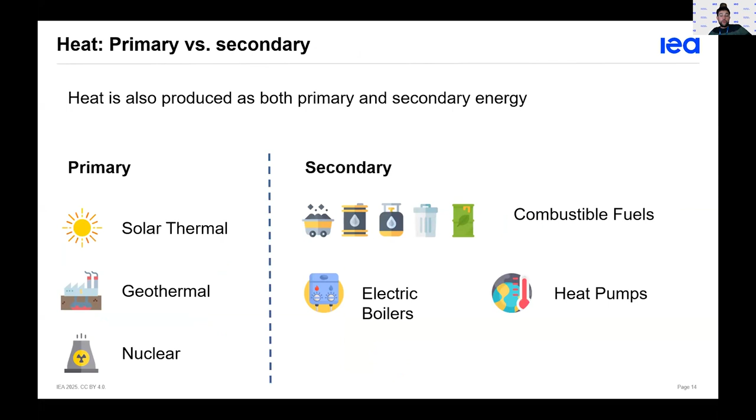By burning combustible fuels, from transforming electricity into heat in electric boilers, or using heat pumps to capture heat from low temperature sources.

Let's have a look now at the producers. As you may know, electricity and heat producers can be divided into two categories: the main activity producers and the auto producers. So main activity producers generate electricity and heat for third parties as their primary activity. It means that the main purpose of the facility is to generate electricity or heat. For instance, if we think about a nuclear power plant, we have the little logo there. This is a perfect example of a main activity producer.

By contrast, an auto producer generates electricity or heat only as a secondary activity in support of their primary activity. So again, another example, a large chemical facility may have an on-site power plant to generate electricity or heat for use in the production processes, and some of this electricity or heat may also be sold. However, the main purpose of the facility is to produce chemicals, not to produce electricity or heat. So that's why these would be classed as an auto producer.

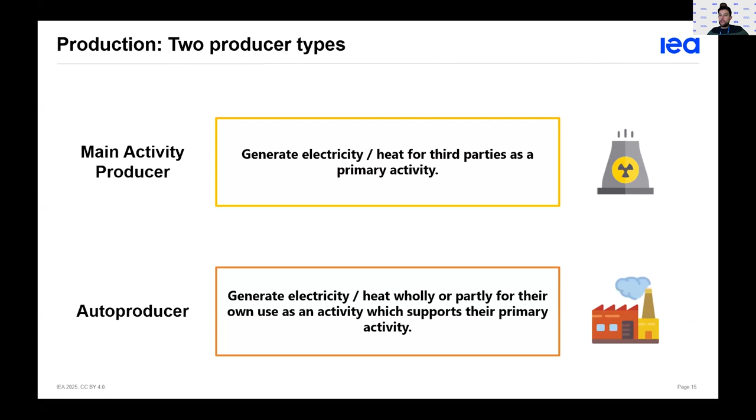And it's very important because it's something that we discussed many times with our contacts, with the countries. It's important to note that this distinction is not based on whether the plants are public or private, but on their primary activity. So main activity producers and auto producers can be public or private companies. So the ownership is irrelevant.

We have also three different types of plants. Electricity-only plants, which, as the name suggests, only produce electricity. We have heat-only plants, which again generate only heat. And also we have the combined heat and power plants, or CHP plants, which can generate both electricity and heat in a combined process.

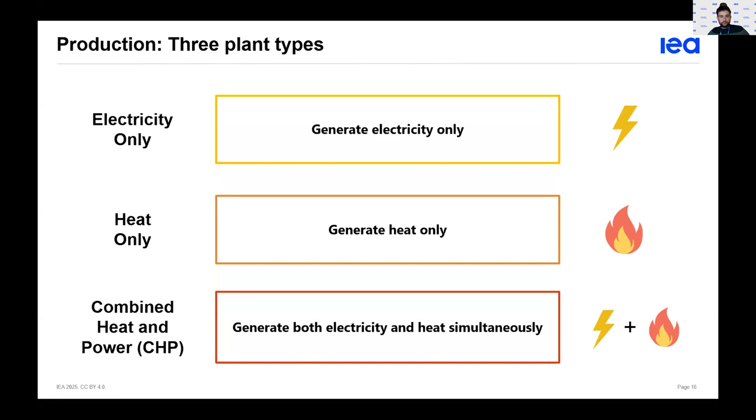This distinction is important. These two distinctions that we made, so main, auto, and the three kinds of plants, are important because we have some reporting conventions used in the reporting of electricity and heat statistics. And this is very important and fundamental to report correctly electricity and heat statistics. For the main activity producers, the convention is very simple. So all production of electricity and heat is reported from all plants.

For the auto producer, the situation is different. So for electricity, all electricity produced is reported in the questionnaire or in the statistics. However, only the amounts of heat sold are reported. The amount of heat generated for own use on site, those are not reported. Similarly, when reporting the associated fuel inputs to electricity and heat production, for heat, only the amounts of fuel input associated with heat sold are reported. So this is very important.

I added a note because, for those reporting with the annual questionnaires, in the new questionnaires there is also the option to collect now the heat auto-consumed by auto producers. This is just a note that I wanted to add.

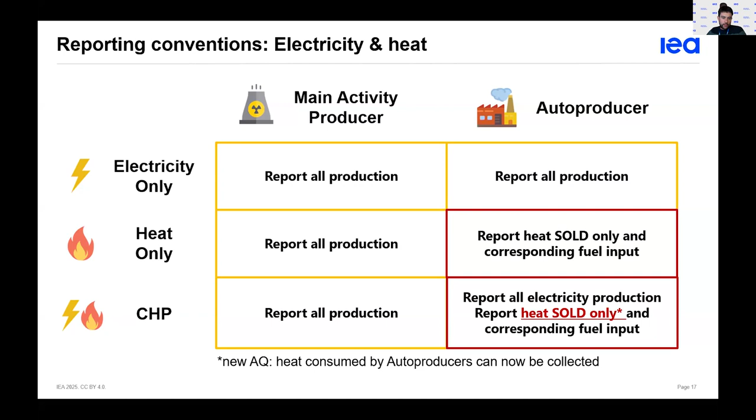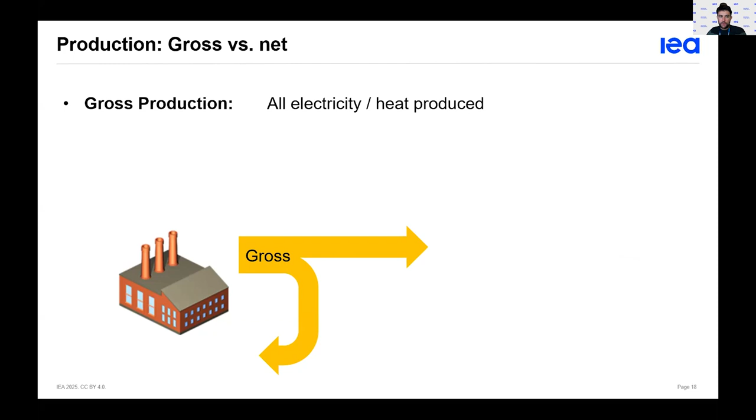Another important concept, which sometimes can be confusing as well, is the distinction between gross and net production. Gross production refers to the total output of electricity or heat generated in a facility before any amount of energy is used. Of course, not all of this energy is used beyond the power plant. Some of the electricity and heat generated is used on site at the power plant for lighting, heating, supporting the plant operation. And this is called own use.

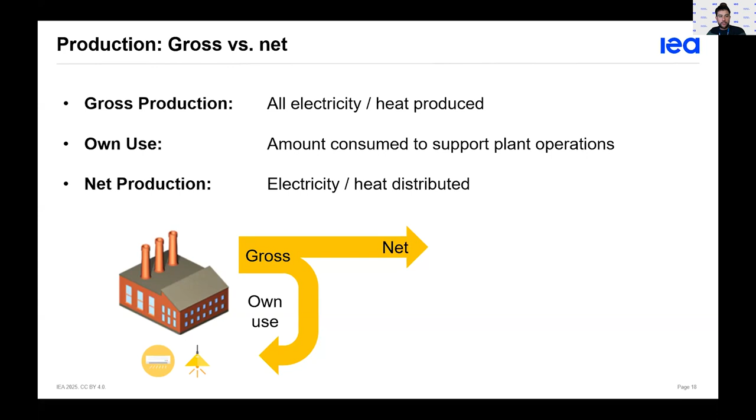So what we call net production is the difference between the gross production and the own use. And we also have a reporting convention for own use, and this is due to the reporting convention that we discussed before about heat in auto producers. So again, for main activity producers, the convention is very simple. The net production is equal to gross production minus the own use.

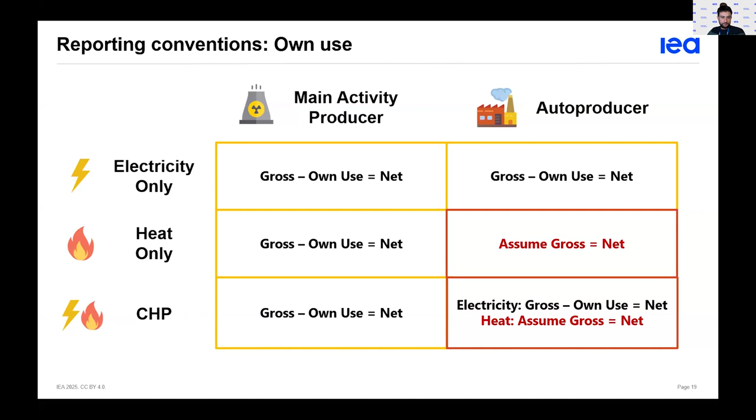Now we have covered, I would say, the tricky part of the presentation, because the reporting conventions are always very tricky and very difficult sometimes to understand. Let's have a look now at the electricity and heat supply chain and at some of the data that we collect in our questionnaires.

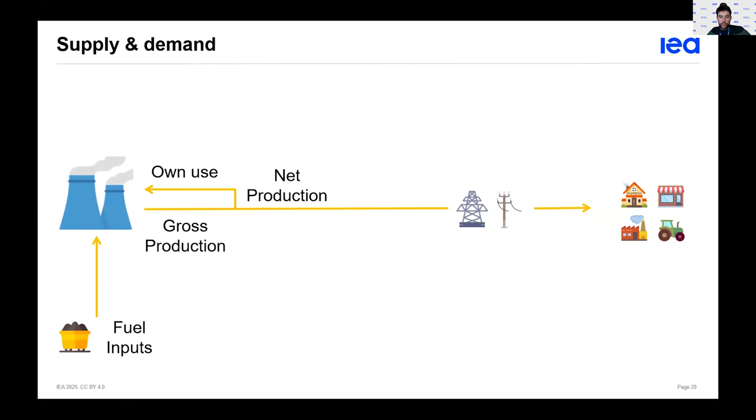In terms of supply, what we collect are the fuel inputs to electricity and heat generation, the gross production, and the own use. The net production is the difference between gross and own use. We also collect information on the electricity used for pumped storage hydro, for boilers, and for heat pumps. Finally, on the supply side, we also collect trade data, the exchange, imports and exports of any country with respect to others.

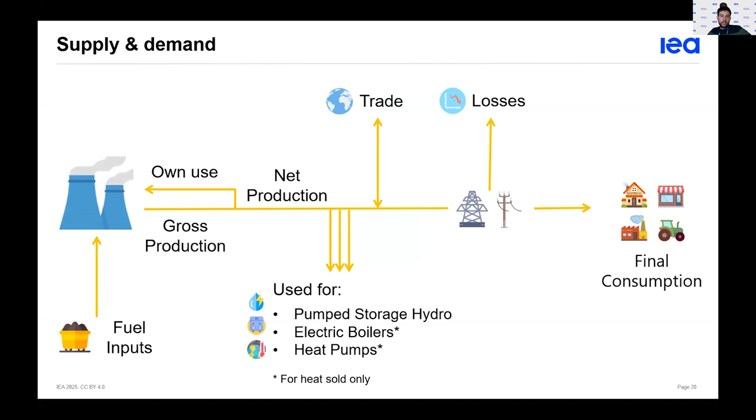On the consumption side, very important, we have the losses, which we mentioned a little before. During transmission and distribution we have some losses that I will explain later in more detail. For final consumption, we also collect data depending on the different sectors. Finally, we also collect data such as peak load and capacity data, which can be useful for electricity analysts.

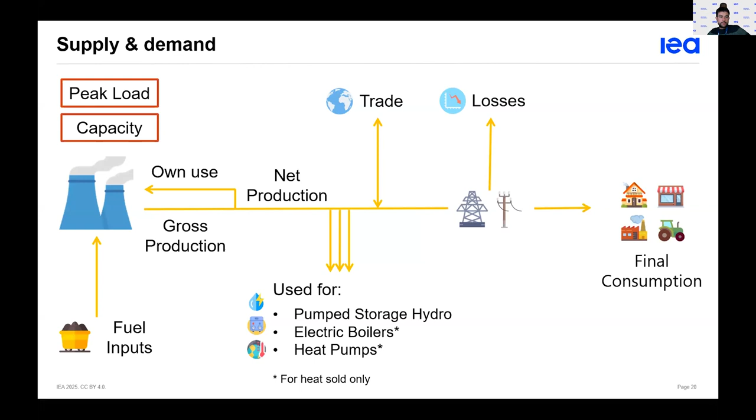As I mentioned, transmission and distribution losses occur between supply and consumption, and they are one of the reasons why there is a difference between the values of supply and the values of consumption. As electricity travels through cables and transformers, energy is lost along the way. Much of this is in the form of heat, because when electricity flows through a cable it raises the temperature. This energy is lost and dissipates into the surroundings, reducing the amount of electricity that reaches the final destination.

In general, losses can be expected to be in the range of 5 to 15%. Losses are lower in more advanced and well-maintained grids, and higher in older or more distributed grids, or where there is a high rate of meter bypassing, that is, electricity theft.

This is what we were discussing before. If we consider the global gross electricity production, we have a value of around 30,000 terawatt hours, but just 84% is able to cover the final consumption, the demand, because around 16% is lost in own use and losses.

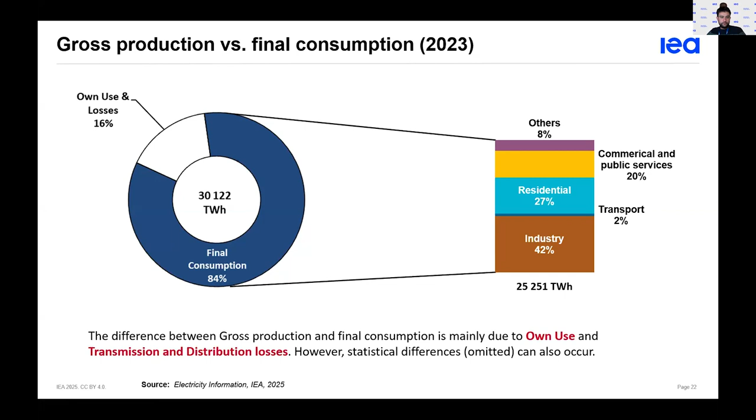Now I would like to speak about some concepts that can be really useful as checks when reporting electricity and heat data. The first is the generation efficiency. Efficiency is calculated as the total gross energy produced by a plant divided by the energy content of the fuel used to produce it, basically the energy output over the energy input. Since energy cannot be created from nowhere, efficiency needs to be lower than 100%.

The efficiency differs by fuel and technology. If you think about a coal power plant versus a combined cycle power plant using natural gas, generally the combined cycle has a much higher efficiency. It must be calculated in energy units, meaning we need to use the same energy units for both the inputs and the outputs.

This is a simplified example of a power plant using 100 units of energy as input and producing 20 units of electricity and 45 units of heat as output. The general efficiency of the plant would then be 20 plus 45 over 100, so 65%.

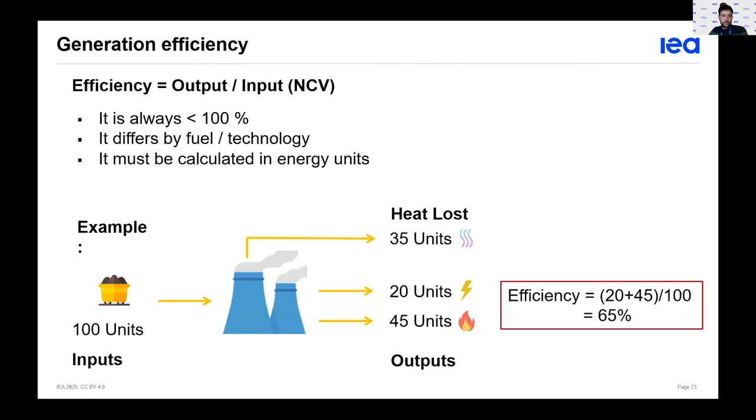It's interesting to discuss trade, because we have a unique reporting convention for trade in electricity. Unlike other fuels, trade of electricity and heat is reported on the basis of the borders crossed, not on origin and destination. This means that we include the amounts in transit.

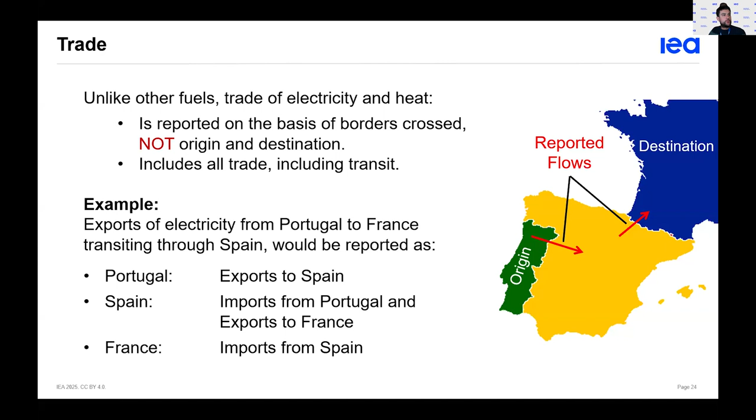For example, if Portugal exports electricity to France, it needs to pass by Spain. Portugal would report these exports to Spain. Spain would report both the imports from Portugal and the export to France, and France would report the imports from Spain.

Another concept which I find useful to discuss is the difference between energy and power. Simply put, power is the rate at which energy is used or produced - it's the energy divided by time. But what I want to stress is the difference between watts, which are units of power, and watt-hours, which are a unit of energy.

And finally, a discussion about capacity. What we define as net maximum capacity is the maximum power output that can be supplied on the 31st of December, the last day of the reporting year. This is very useful data for analysts, but it can also be useful for us, statisticians, when checking the data to understand if the data reported are consistent or not.

For example, we can compare the actual reported production with the maximum potential production to check if the data makes sense. This is called capacity factor. What is the maximum potential production? It's the production that a power plant or a country would have if producing at maximum capacity all the hours, all the seconds of the year. So it's capacity multiplied by time.

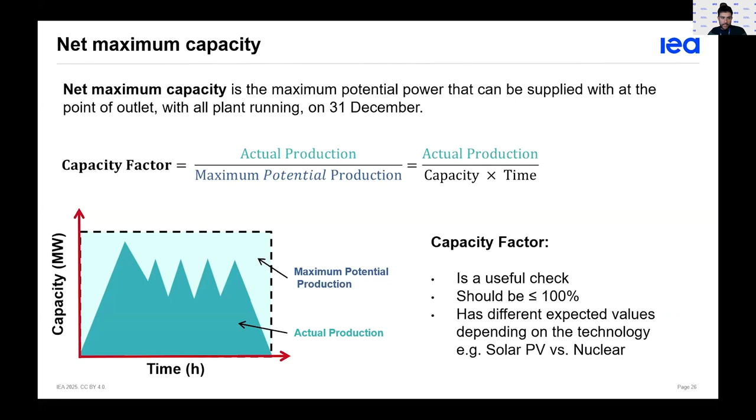I'd like to quickly mention a couple of facts about data collection and the types of data collection that we have. With all statistics, data collection has a cost in terms of time, money, but also opportunity cost. Therefore, a balance must be struck between available resources and needs.

This said, I like to stress that not having the proper information available for informed decision making can lead to higher costs in the future. In terms of specific challenges for electricity statistics, the liberalization of electricity markets has had an impact, because previously, where there were monopolies, all the electricity data could be gathered from one company, but now data needs to be gathered from many different companies, and this can impact data coverage and comprehensiveness.

In terms of data collection systems, to facilitate data collection, we should establish a legal basis, establish a proper reporting mechanism, allocate proper resources, as always, and establish also a proper dissemination scheme.